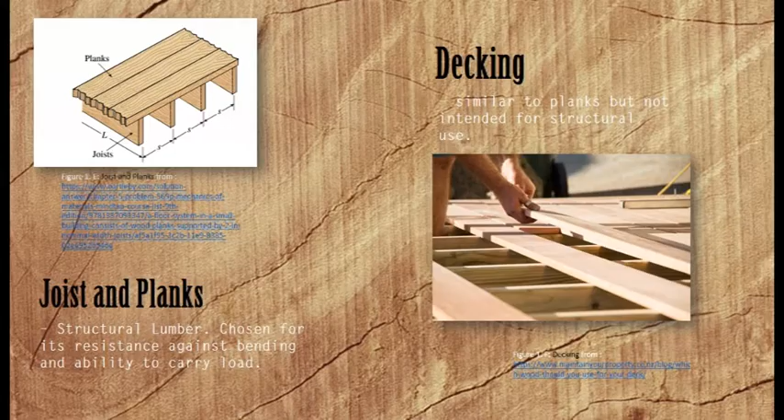Light framing is non-structural lumber intended for non-load-bearing applications. For example, this image shows a house of simple wood frame construction, full of frames.

The most important components are the studs, the upright members to which sheeting or paneling is attached; joists that support a floor or ceiling; and rafters, the parallel beams that support a roof. Other heavier lumber is used for joists and other supporting timbers.

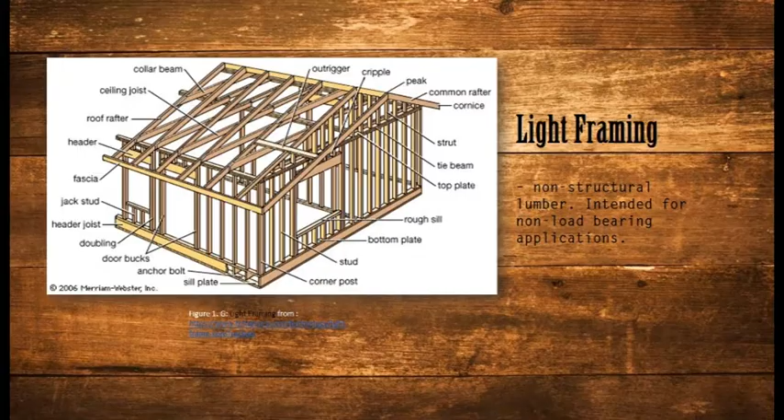Timbers are yard lumbers having 5 inches or more as their least dimension on either side. All timbers are structural lumbers.

Structural lumber is chosen for its resistance to bending stresses on the floor or ceiling beam and under the floor slab, for stringers are primarily longitudinal supports.

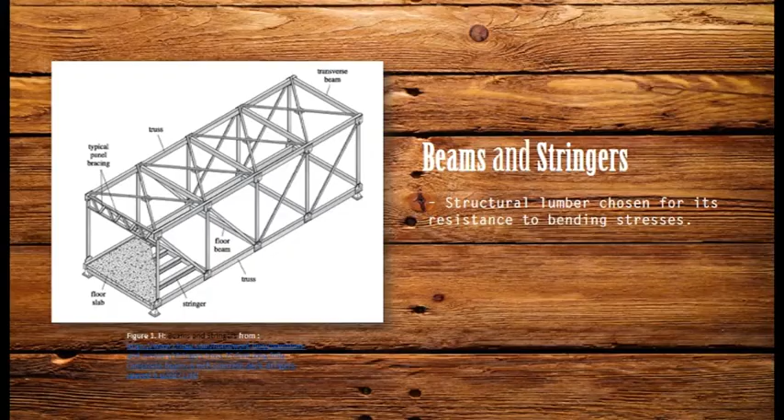Post and lintel: structural lumber intended to carry axial loads. This is usually used to hold up a roof, creating a largely open space beneath for whatever use the building is designed for. The horizontal elements are called by various names including lintel, header, architrave, or beam, while the supporting vertical elements may be called columns, pillars, or posts.

Factory lumber, also known as shop lumber, is lumber manufactured for use in other types of woodwork, such as doors, windows, moldings, and other wood products.

We have two different types used in factory lumber: matched lumber, which is lumber having edges dressed and shaped to form a tongue and groove joint when laid edge to edge or end to end; and pattern lumber, which is lumber dressed and shaped to a pattern or molded form.

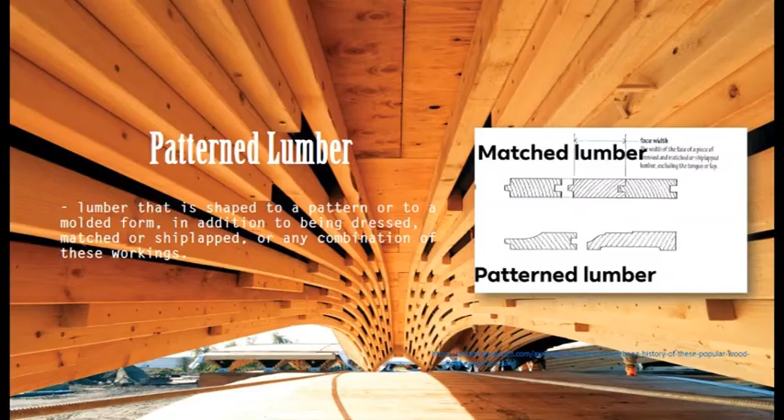Thank you, Mark. Today I would like to discuss dimensions and measurements. Lumber in the industry is identified in practice by its nominal dimension rather than its actual or dress size, for ease and efficiency. Nominal dimension is used to obtain the unit for lumber volume, which is board feet, basically meaning we address lumber by its nominal dimension rather than its actual measurements.

So what is nominal dimension? Nominal dimension refers to the dimension before dressing and surfacing, commonly used for convenience in computing the quantity of lumber. It is the dimension of the rough cut lumber.

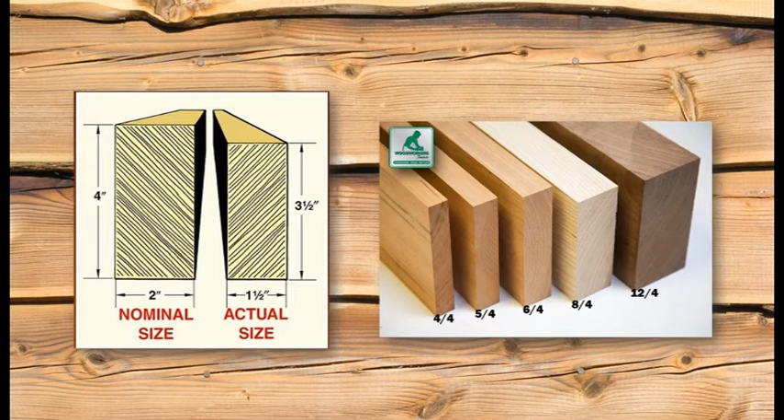Dress dimension refers to the actual dimension. These are lumbers that have undergone surfacing and seasoning, which significantly reduces the lumber compared to its original dimension. So nominal dimension is the measurement for the lumber before it is processed, while dress dimension is its measurement after it is dried and planed or seasoned.

Board feet is the accepted unit of quantity for lumber. It is derived from the volume of a lumber with squared side dimensions, length times width of 12 inches with 1 inch thickness. Board feet is the unit of measurement for the rough lumber. The difference between this and the nominal dimension is that the actual length is used.

The following formula is the inverted formula often used in the industry for lumbers with longer lengths. Board feet equals the number of pieces times thickness times width times length, over 12 inches.

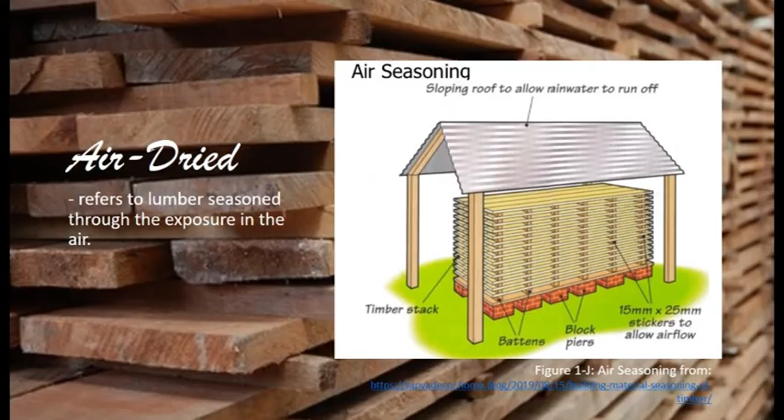The second widely used way of seasoning lumber is through kiln-drying. Kiln-dried refers to lumber seasoned through a kiln that has control over the heat, air circulation, and humidity, unlike air seasoning, which results in unevenly dried lumber.

Kiln drying is the most common and effective process for drying wood, with the advantage of a rapid process of removing moisture through the use of external energy. It takes up to 2 days to 1 week depending on the type of wood, with the ease of monitoring the wood for its desired moisture content, along with making sure that fungus and insects that may cause degradation are killed during the process. Kiln-dried lumber often has lesser moisture content than air-dried.

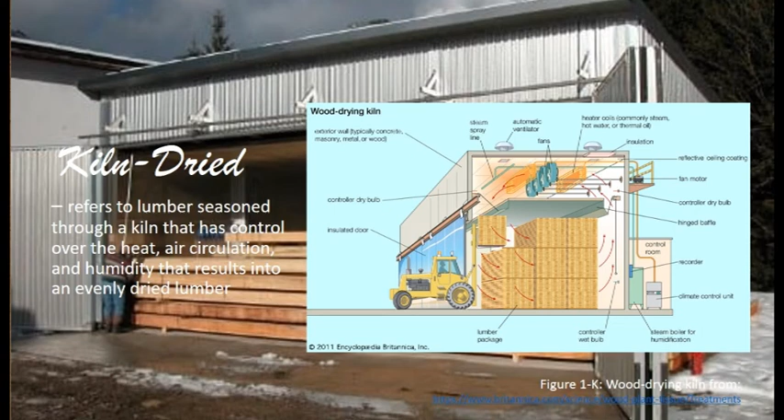In this visual presentation, the kiln is like a large oven. The lumber is stacked the same way as for air drying, and is placed inside a chamber in which conditions can be varied to provide the best seasoning result. Air is circulated around the stacked lumber, and the temperature and humidity can be varied to provide optimum drying. Each wood has different cell characteristics, and would therefore require different drying schedules.

There are at least two methods used for kiln seasoning. The first is progressive kiln, where lumber enters at one end and travels on a trolley through chambers with different air conditions to progressively dry the wood. The progressive type kiln requires less skill in operation and consumes less heat per pound of water evaporated from the wood.